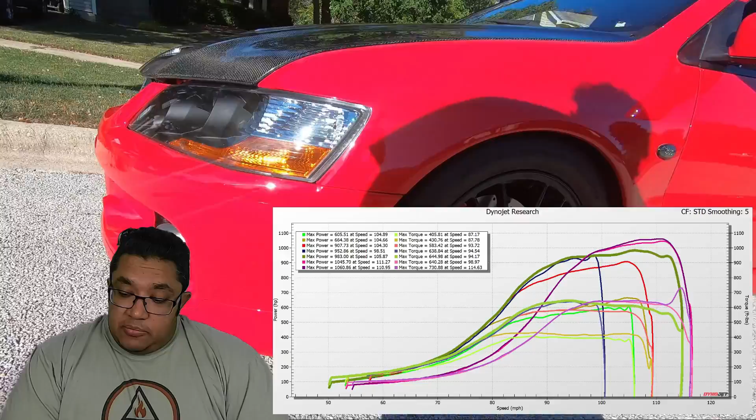But today I decided, because I've been getting a lot of questions about that red car that I made 1067 or 1063, whatever, the red Evo, about cost. So today I want to make a quick video on cost analysis of what does it take to make a 1,000 horsepower daily driving Evo, and what are some ups and downs, and what's necessary and what is not.

So I'll do a comparison to this red car, what we have in it, how much it costs, a ballpark figure. And this is going to be real cost, not my cost, a walk-in customer cost. And what are some alternatives? Where can we cut some corners or maybe do different parts or a build that would get us to the same goal? So the goal here is 1,000 horsepower. What does it take cost-wise to make a 1,000 horsepower Evo?

Couple of things. I'm not going to include things that were the owner's choice, cosmetic or whatever parts preference he had that's not necessary to our goal. And remember, this is only dyno 1,000 horsepower plus. Everything else is up to the owner's discretion and will not be calculated. So let's start with the back of the car.

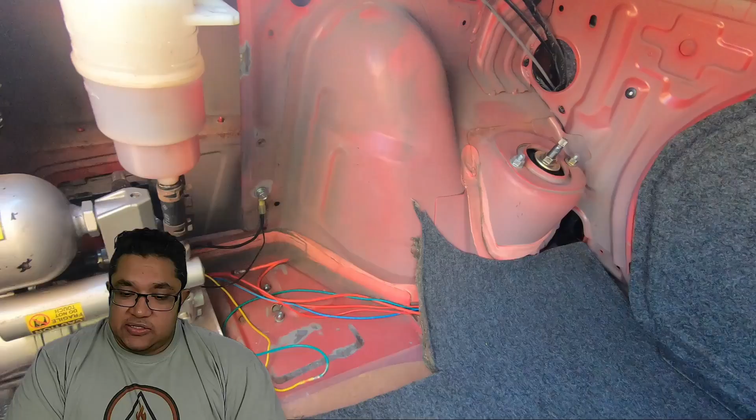The red Evo is actually an Evo 9, so it has an AYC system. What we had to do was relocate the AYC into the trunk to make room for a fuel system component where the AYC system is, which is in the driver's side front wheel arch. So that is something you can do if you have an AYC. Another option is basically to delete the AYC. When you do delete it, I would personally convert to a non-AYC front transfer case. If not, just pick up a car that doesn't have AYC in the first place.

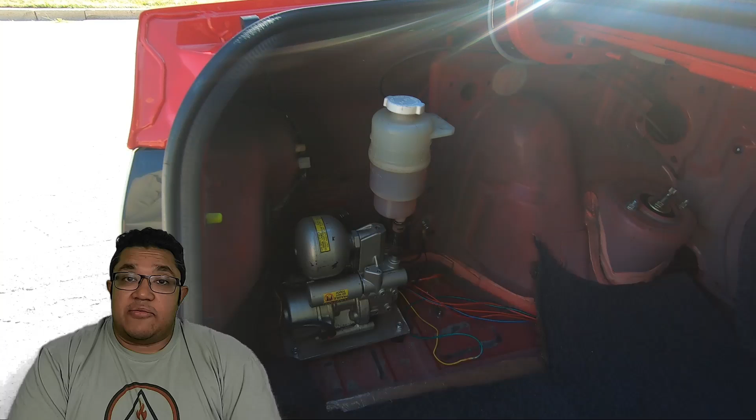If you do decide to relocate it, it's just parts and labor. It was basically the mount, which took us about 3 to 4 hours to make. And then the wiring, everything to the front, high pressure pump line, fluid line, and that's basically it. So overall, around 6 hours worth of labor. Really not much parts to it because it was just fluid and wiring, which doesn't cost anything. So it's basically a fab job. The alternative, as I mentioned, will save you some money. You don't have to have it for the 1,000 horsepower goal.

While we're at the trunk, the battery relocation kit. It is not necessary, but it'll make the fabricator's job, or everybody else's job, a lot easier if you just have your battery in the trunk. That's an easy kit, I think it's like $150 to $200. But we did our own. It was just a bolt-on, 2 bolts into the trunk. The battery itself and the wiring kit was like $50. It cost us about an hour worth of labor.

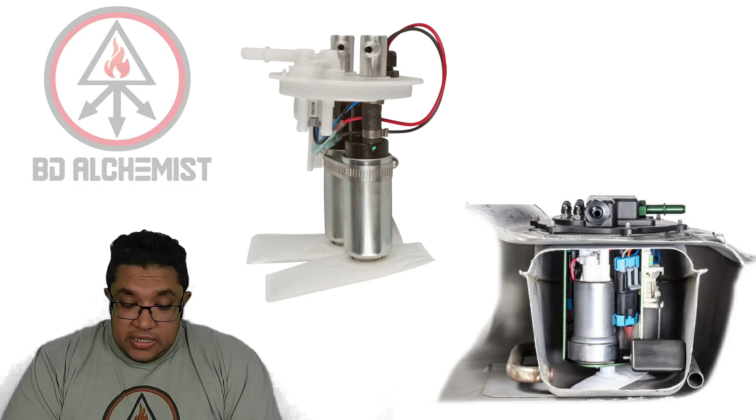And then near the trunk, our fuel system. There's just a Walbro 450 in the tank. Sorry, he doesn't have a stock hanger, he has a Radium fuel hanger. It's not necessary to run this kind of power on a Radium fuel hanger. You could just get a stock one, put a 450, run a 10 AN feed to a surge tank that's in the wheel well. That surge tank cost around $350 to $400.

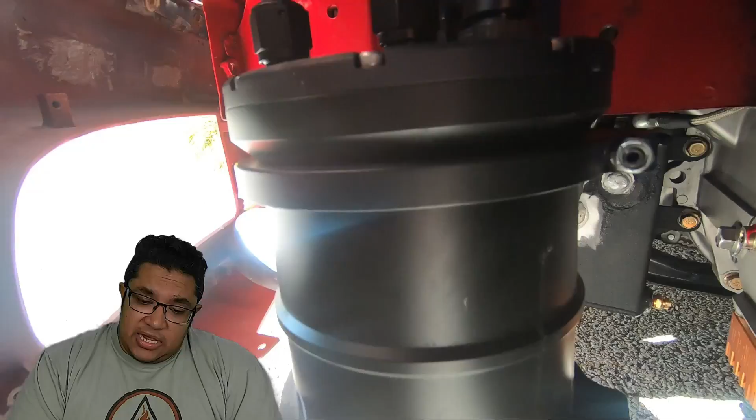10 AN feed from there to the mechanical pump. The mechanical pump here, from Magnus, cost around $1,400 to $1,500. Here's an alternative. We're aiming for 1,000. We really don't need a mechanical pump for 1,000. It's just overkill. If you want to do overfueling, you could do one 450 fuel pump in the stock hanger.

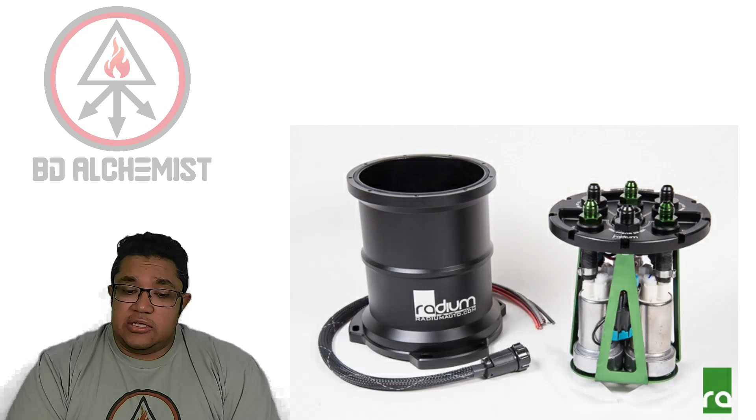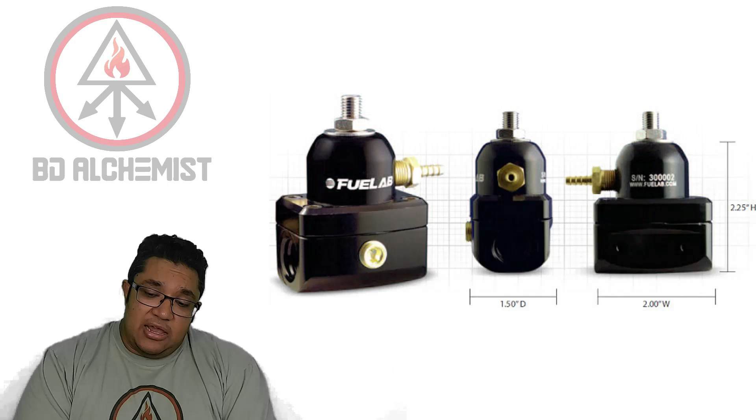So that's an alternative. A fuel pressure regulator is highly recommended, and you have to have another fuel line going into a return line from the rail going back into the surge tank, and from the surge tank back through the car, to the back of the car, which is the fuel tank. That's basically the Red Ninja's fuel system with the mechanical.

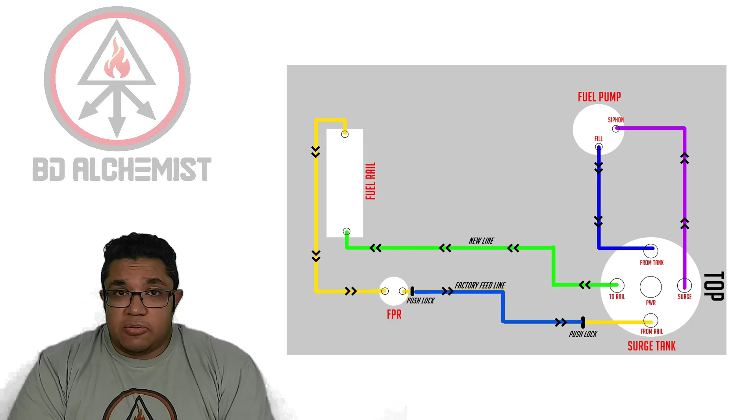Again, you can go with an external surge tank with a dual pump in it, and there's another one in the trunk to feed that surge tank. Or you can go straightforward with 2 450s. I have made 1,000 horsepower plenty of times with just 2 450s and ID 2000s or FIC 2150 injectors on E85. X98 is going to be a little tough because it requires a little bit more fueling, but it can be done. So those are the bare necessities for the fuel.

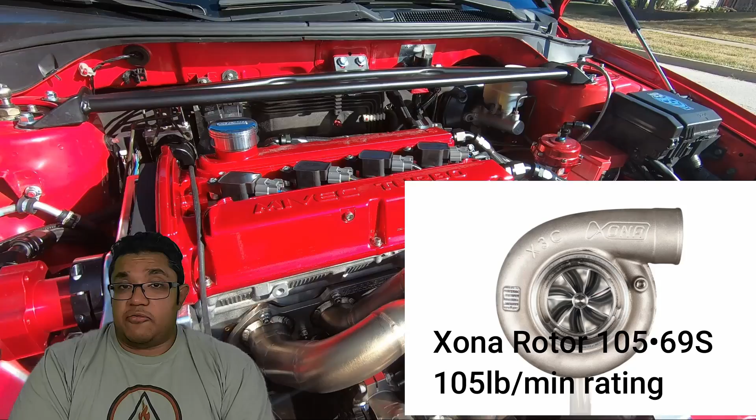As far as everything else goes, the turbo kit now has a GT 4200, which is not the only turbo that'll get you there. A Super 99 if you can get a hold of it. The Xona rates it with the horsepower in mind or flow in mind. So I think they have an 80 106 or something like that. I forget, but they have a turbo that's pretty much a little smaller than the 42. It'll get you there. Unfortunately, it comes in V-band. It's gonna spool a little slower because of the size of the turbo compared to a T4 twin. But on a V-band, the hard parts will be less.

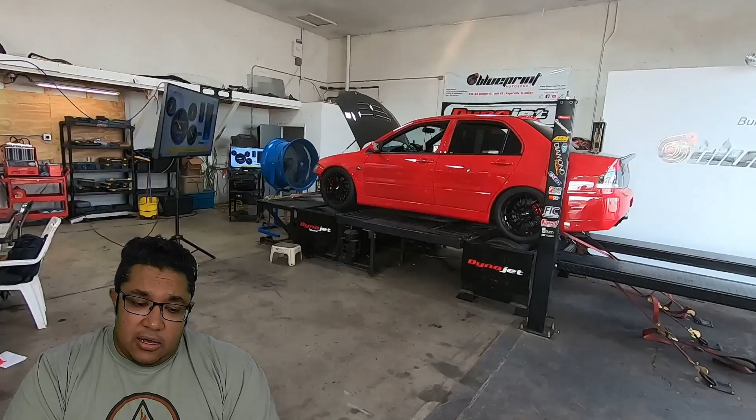Also the Precision 7275, the older 7175, a 7286, they will all get you to your goal of 1,000 horsepower easy. When choosing a turbo for 1,000 horsepower, you want the turbo to be rated more than 1,000 horsepower. So it's just easier to make it. A turbo kit, expect brand new to cost anywhere from $4,000 to $6,000, depending on several factors, and that's a complete kit. Installation, if it's front facing, in this case it wasn't that big of a deal. I think we charged like 3 to 4 hours. Not quite sure, but that's typically what you expect to pay.

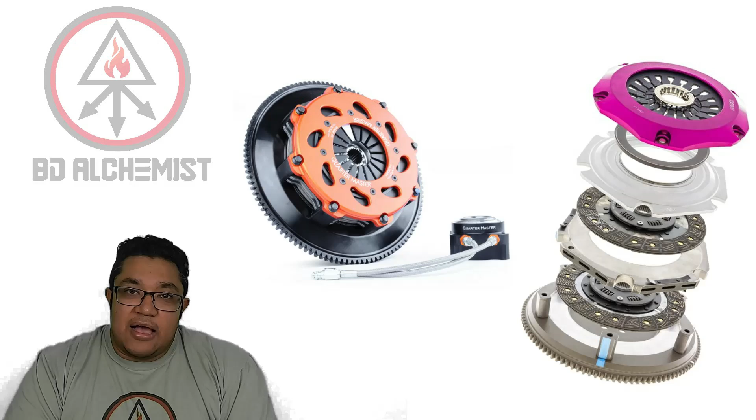Turbo, what else we got? We got the clutch system. It's a triple disc. Unfortunately, there's no way around it. That costs close to $2,000. Expect to pay that. It's not going to be extra added labor because you're breaking the motor down anyway to rebuild. But an alternative to that is the Quartermaster 8-leg. It's a little cheaper, but it'll hold. I hate that clutch. It's a very strong clutch. It'll hold, but I hate it for daily driving, it's just too rough for me. I'm an old person. But that's an alternative.

The transmission does not need to be built because we're aiming for 1,000 and it's on the dyno. It'll hold. Nothing's gonna break. Yeah, if you launch it. For this purpose, we're not considering anything for longevity for the drivetrain. If you're gonna break something, well, you can always break something. But it's not necessary to be built for 1,000 horsepower. You get some life out of it too if you don't launch or do crazy stupid things.

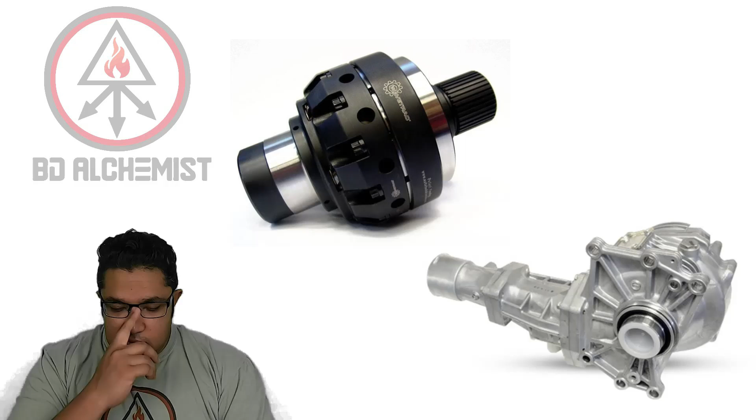The front transfer case is not built, but in our case, it is built. It has stage 3, I think, TRE, and it has a Wavetrac in it, which is also not necessary for 1,000, but it is necessary for rough use and always hitting it, launching for racing. So we can add that to the cost. It costs $1,000 to do that, and to rebuild, I think it's like $600, or $700 just to freshen up and add the thing. So altogether it's like $1,500.

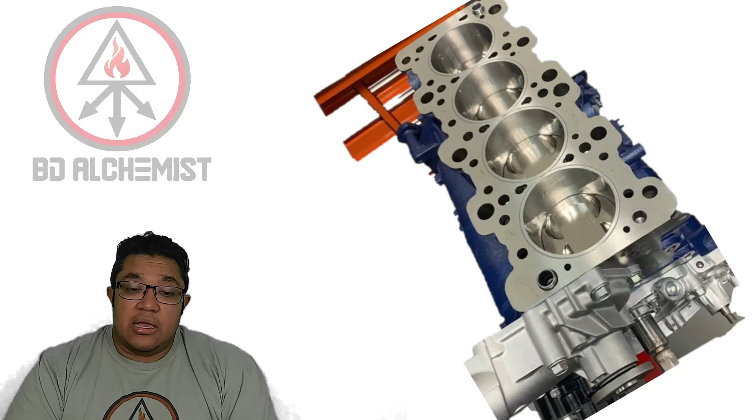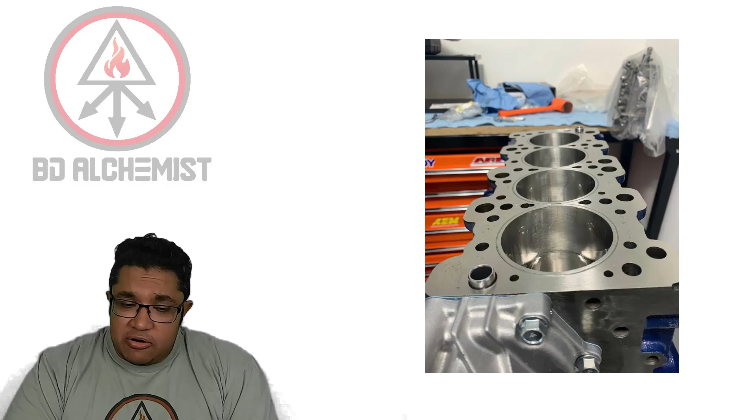The engine. Now, we went with the brand new block from Mitsubishi, which costs around $1,800. You can find a used one. If you have a used one, obviously that's not the cost. We went with a stock crank with I-beams and pistons. So I would say with our specs, everything that we have done to the engine, it's still a wet block. The engine itself, if the customer supplied it, is going to be anywhere from 4,000 to 4,500. And then if the customer didn't, add another 1,500 to that because you didn't supply the core.

The head, also same deal. Kurt Brown did it, but currently, you know what happened. He's passed away, unfortunately.

The head with our spec, with S3 cams, with the springs, retainers, decking, all the good stuff, porting, oversized valves. You can expect anywhere from 2 to 3,000. I'm sorry, 2 to 3,000 average.

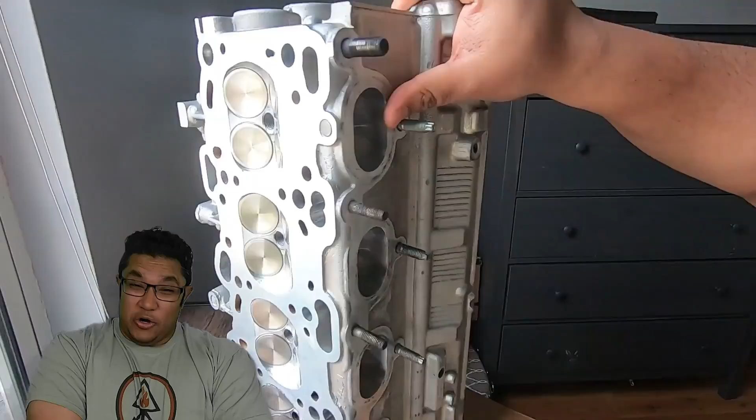Now, you don't need all that stuff though. I don't think oversized valves are necessary to reach 1,000. You could do it on stock size valves. Porting, depending on who does it, is a hit or miss. It can actually hurt the performance. S3 cams are necessary. So with cams and everything, you can expect anywhere from $2,200 to $3,000 with parts and labor and everything included.

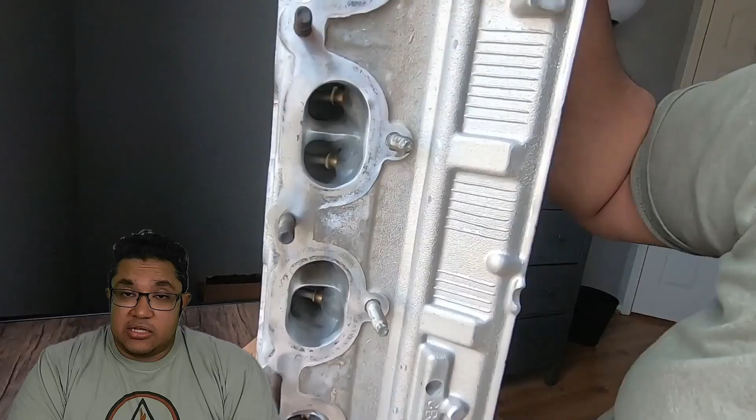Total motor assembly, top to bottom, we charge around $1,000 to $1,500 depending on the complexity. And if you bring us a whole car running, for us to take everything down and put it back is $2,500. So to get around that, you would have to do your own work. There's really no other way to get around that. So we have the engine, we have the head, we have the turbo, we have everything.

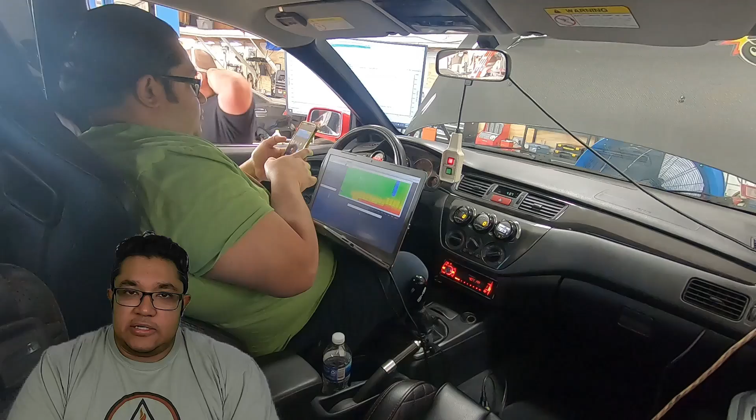Tuning. It is really not necessary to use an aftermarket ECU. Some of the gauges that you need are going to be AFR, boost, oil pressure, fuel pressure. That's basically it. If you do flex fuel, you need the ethanol content sensor. I actually like it anyway, even if you're not doing flex fuel, because you know exactly what you have. You can expect the car to behave accordingly. But you don't need an aftermarket ECU. Stock ECU will get you there with relative ease.

You do need MAP sensors and everything to make that power, because you're going to be hitting close to 50 psi. Altogether, I would say for sensors, other knickknacks here and there for wiring, MAP sensor is a big one. It's $150 or $160 for the AEM 5 bar. Gauges, everything, I would say expect another $500 to $600 for that.

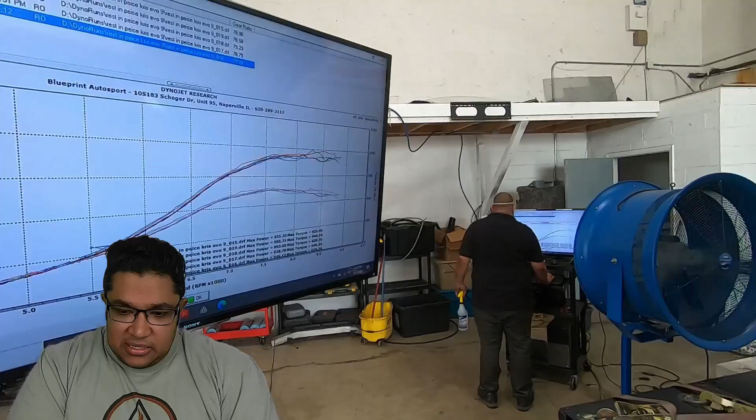Fluid, miscellaneous. The break-in procedure requires more fluid, and you might as well change everything at that time. Expect another $300, including tranny fluid and all this other stuff. $300 to $400 for the fluids. That's basically it.

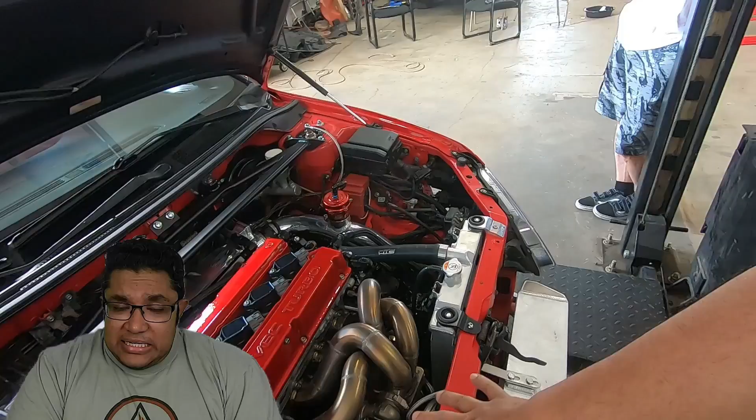Ignition coil. Your stock coils will not get you there. 700, 800, I think 800 was the max I made. You do need good coils. CDI system is an option. I personally have moved away from CDI systems because we have the GTR coils available. They do reach 1,000 horsepower plus. This requires a little tweaking in your coil charge time and all that stuff, proper wiring. But GTR coils would definitely get you there.

I personally would just make the harness myself or buy the harness from some company that sells the kit. And I would personally not buy the coils from them or anyone else. Just go to the dealer and buy it authentic. This happened to us, some of the coils went bad. The dealer just replaced it for free, and this was within 3-4 months. So that's an added benefit, and it's authentic. Just do the wiring part.

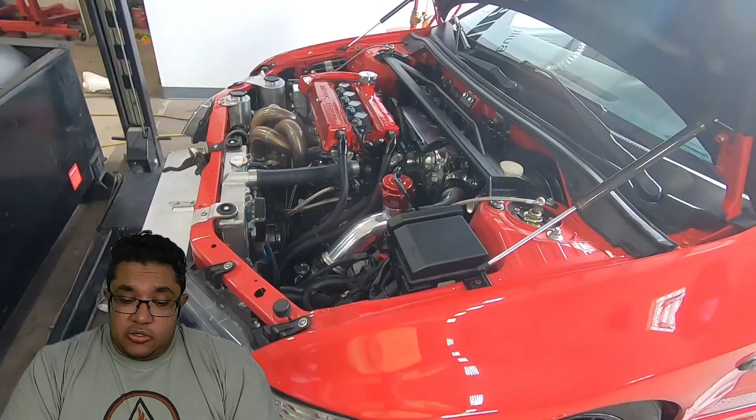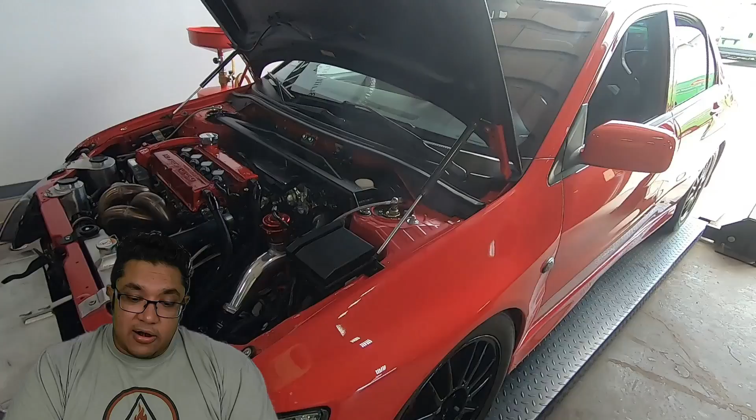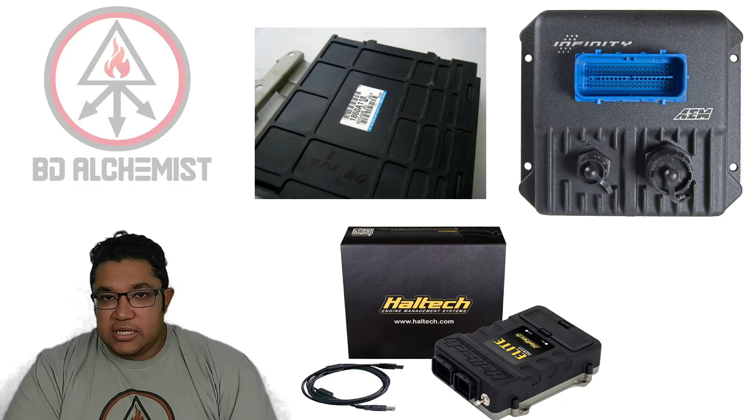So expect GTR coils around $100 to $130, depending on the state that you live in. So expect $500 just for the coils, unless you get the aftermarket ones that these companies sell. I think they're not authentic, but if they are, that's a very good deal. But it's $500 or $600, something like that. So pretty much the same. So coils, another $500-$600. Tuning, depending on the type of tune that you get, flex fuel or not, expect anywhere from $700 to $1,000, $1,200 maybe.

Wheels and tires, I'm not going to cover. That's up to you. If you slip, that's on you. But this will generally get you to 1,000 horsepower. Fuel, an engine that can hold the boost and the power, a turbo efficient enough to compress and flow enough to make the 1,000 horsepower, a kit that can spool the turbo well enough on a 2.0, a head that will let all that stuff in, and the fuel to support it, to hold all that power to your wheels.